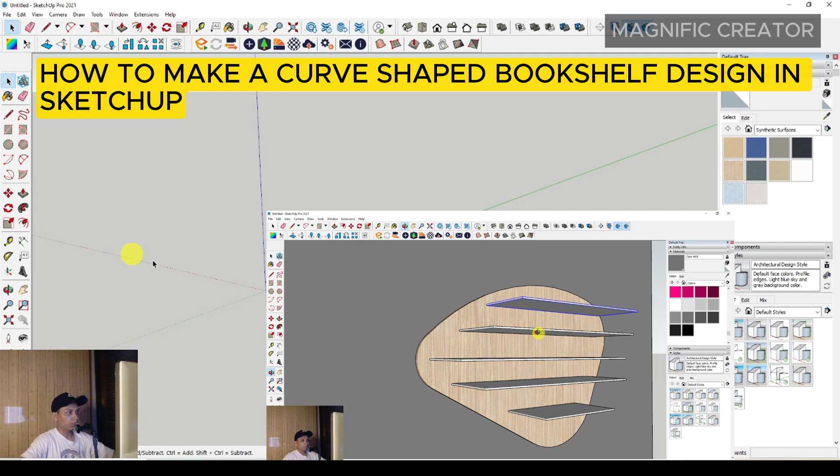Okay, in this video I would like to share with all of you how to make a curve-shaped bookshelf design. First of all, you have to make the existing wall with this rotated rectangle like this, and you can give a thickness of around 150 millimeters, and then you have to push it up until 3000 millimeters of height.

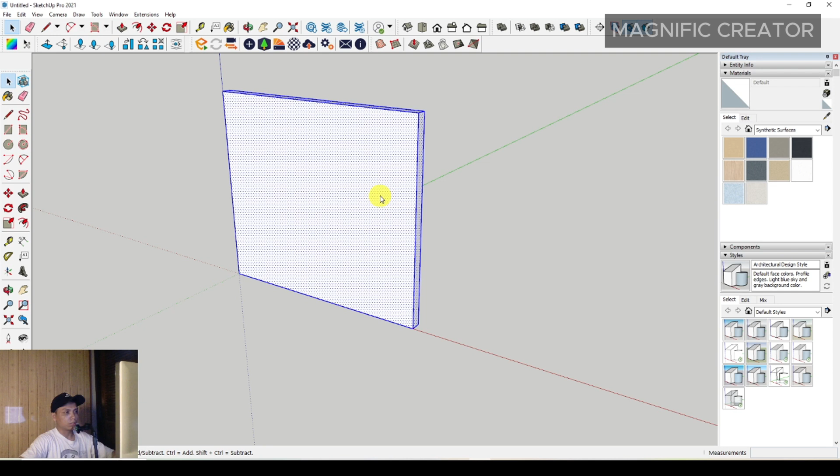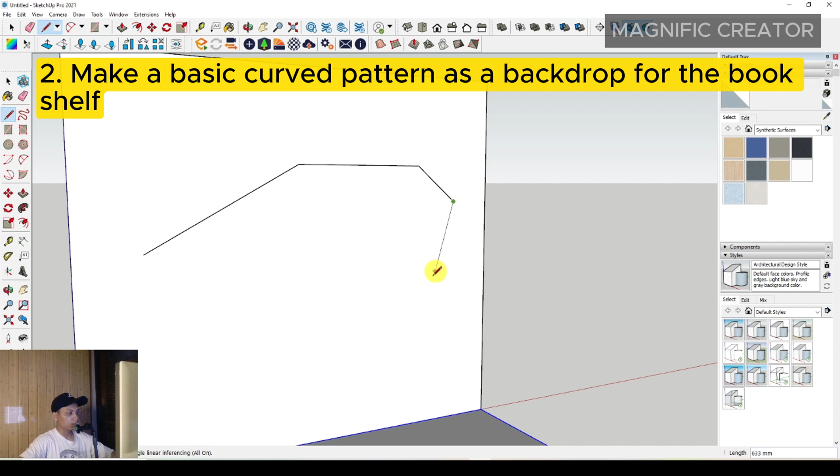Okay, and then you have to make the existing wall also, as usual. Then you have to give any thickness with push and pull and make it a group, and then you can draw the basic shape of the curved bookshelf, something like this. You can use the line to make the basic pattern of the bookshelf, right? Okay, you can follow this step,

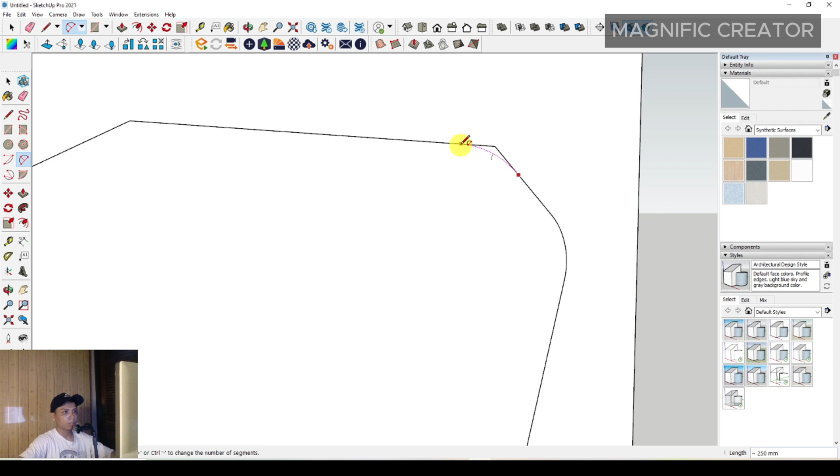and then you have to make a curve on each side with a 2-point arc. You can do this 2-point arc, and then you can follow the step. You can make the smooth corner of each line connection, something like this, and then you can continue.

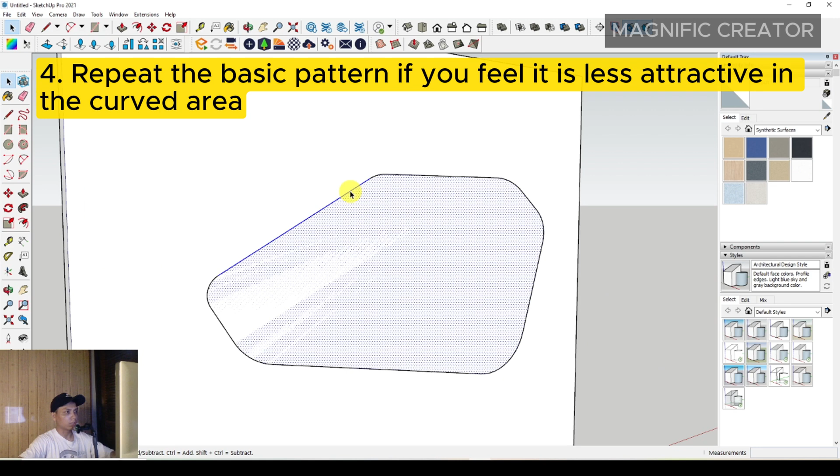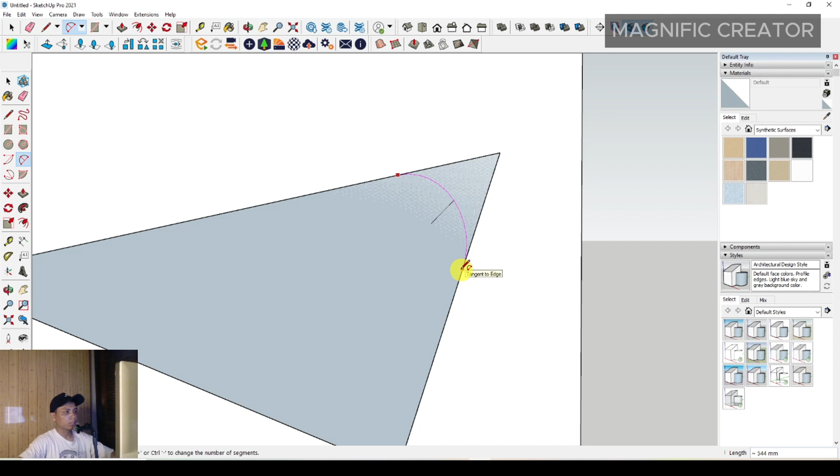Okay, if you think the shape is not good enough, you can try to make the shape again with this simple basic line. Okay, something like this. Then you have to make a 2-point arc again, something like this. You have to make a 2-point arc again, and okay, then you can see it.

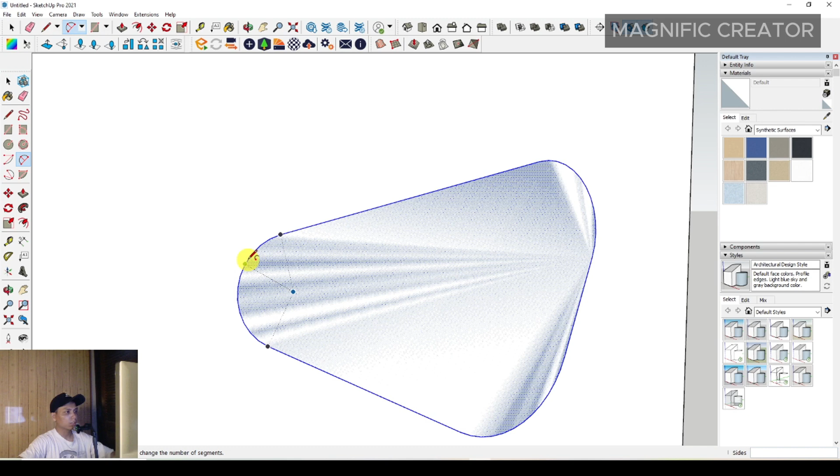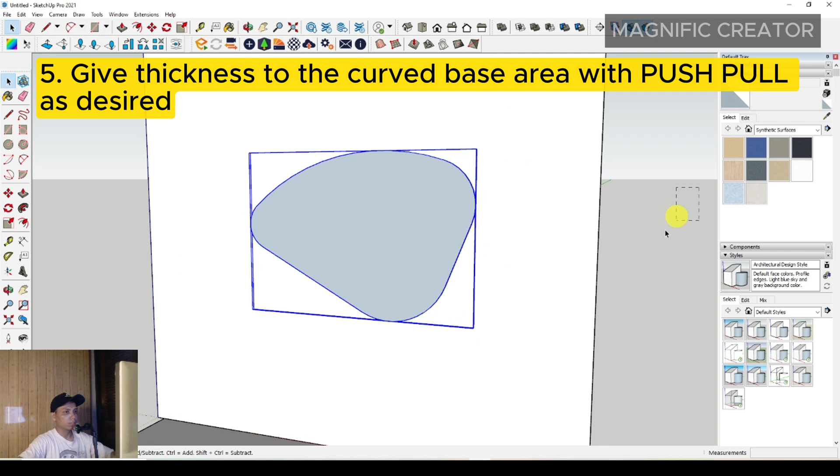If you want to add some more curvy sides, you can just adjust this side of the curvy line, like this. Then you can just erase the unnecessary lines. Then you can see it, and then you can push it to the front, something like this, and then just make it a group, and then you can make a horizontal simple book shelf.

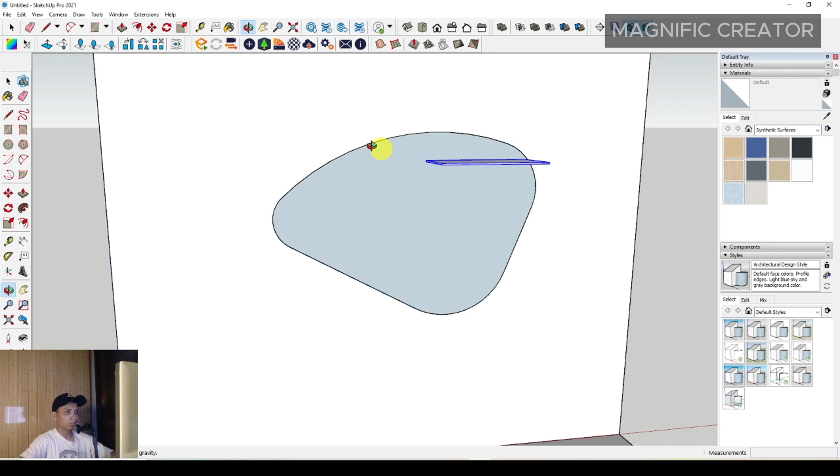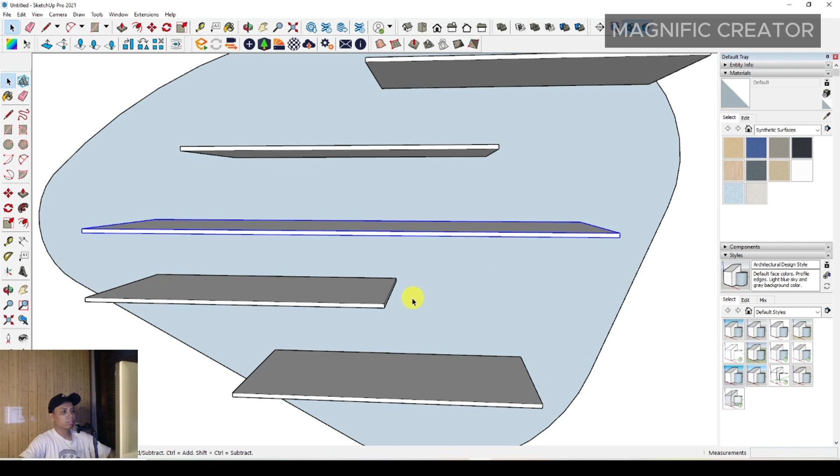You can draw a rectangle and just push it to the front, maybe 350 millimeters only, and you can just make it a group, and you can move it to another side as you want. Okay, and then you can adjust all of the shelves, something like this.

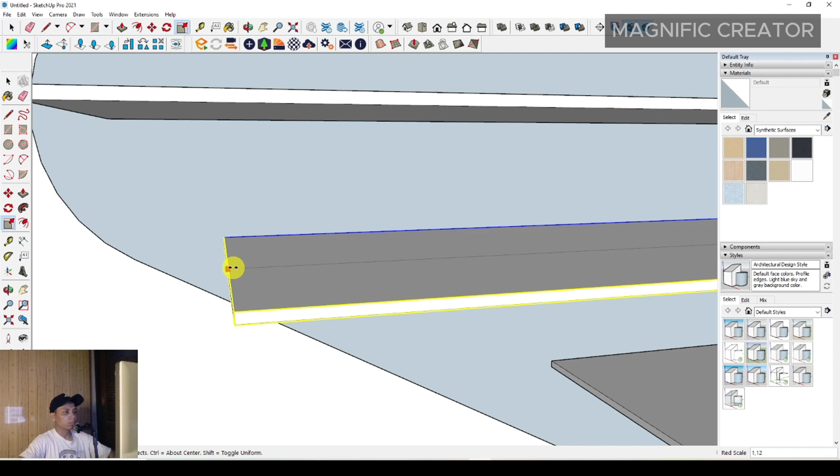And then you can use scale to extend each of the shelves, something like this, so you can see the steps. You can use scale to extend or adjust the length of the bookshelf.

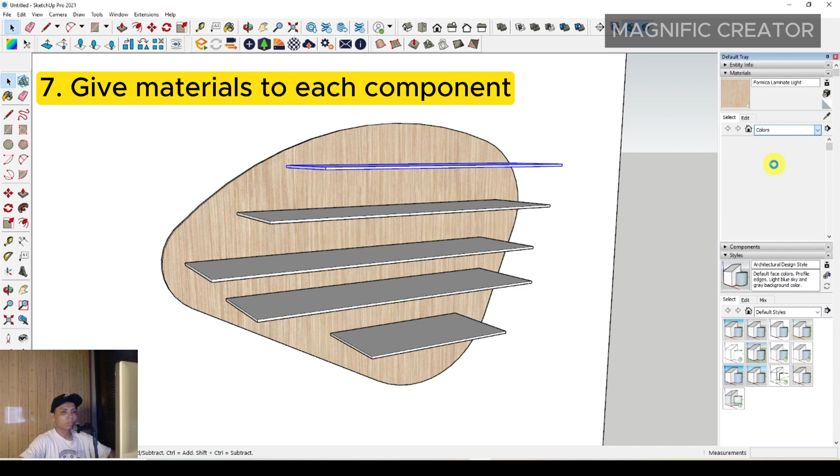Okay, and then you can use the interior material. It's a Formica laminate light, and you can use just white color for each horizontal cabinet, something like this. Then you can adjust the wall color if you want to make the wall different. Okay, maybe it would make a more highlighted bookshelf.